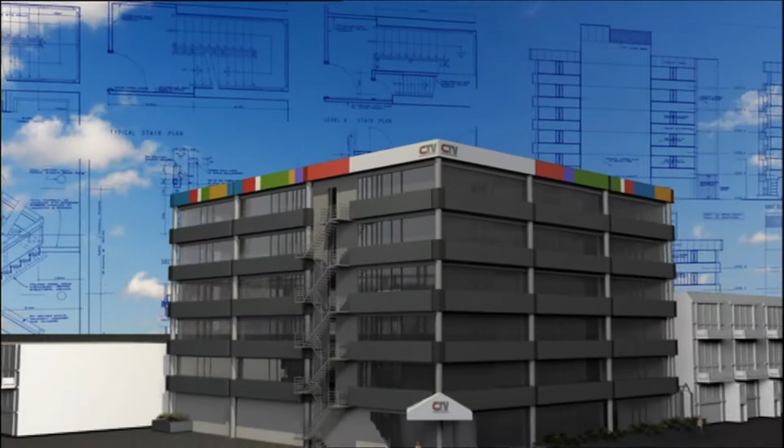When you look at the vacant space where the CTV building once stood, you can't help but wonder why it collapsed when the IRD building across the road seemingly escaped without a scratch. So Sunday went back to the drawing board, to the 1986 plans for the CTV building, and we discovered, even back then, a council engineer questioned aspects of the design. Then we took the drawings to America to get an independent analysis.

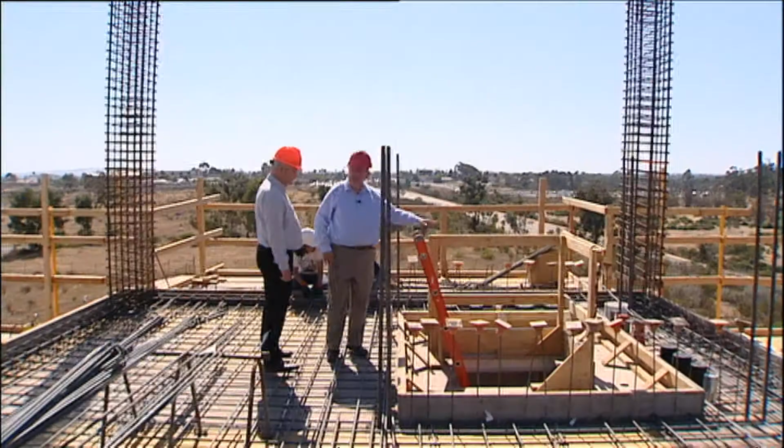San Diego, California. It seems like an unusual place to be trying to figure out why the CTV building collapsed in the Christchurch earthquake. But we've met a man here, a professor of engineering, who figures that he's got the answers. My journey has brought me to the Charles Lee Powell Structural Laboratories, to Professor Jose Restrepo. He spent his life making buildings safer in earthquakes, including 15 years studying and teaching at the University of Canterbury.

Appears to be a column here. Professor Restrepo inspected buildings after the Christchurch earthquake. The central city, he says, was hit by a massive vertical force that no one ever dreamed of. The intensity of the movement felt in downtown Christchurch was way more than what we had designed buildings for. But from the air, it's clear that while the CTV building was flattened, other buildings around it are undamaged. Could the design of this building have been a factor in the collapse?

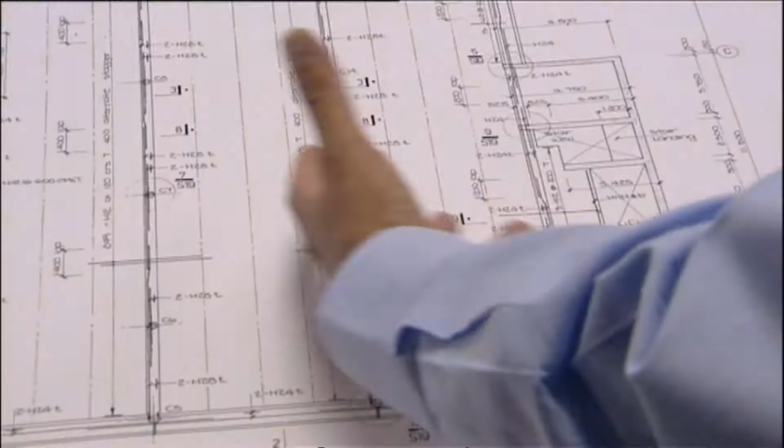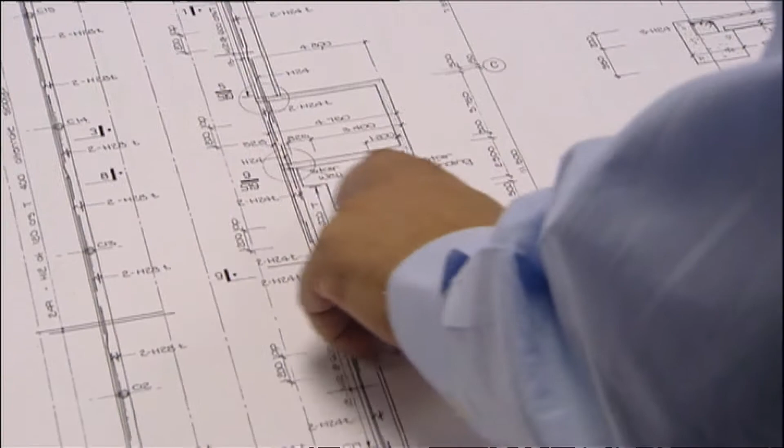There is no reinforcing bar coming out from the wall into the slab, okay? Professor Restrepo studied the CTV drawings. They confirmed his suspicions. You have the lift shaft here that stood up, and you have the floors of the building, okay? These floors and the lift shaft need to be connected, okay? Because in the case of an earthquake, these slabs have accelerations, and those accelerations with the mass produce forces. Those forces need to be taken back to the wall, to the lift shaft. In the CTV building, when we look at the drawings and the spot checks, we do find some critical areas.

The first critical area, he says, is the way the floors are tied to the lift shaft, using in places welded steel mesh. And those connections are rather precarious. They are precarious. And in a way, there were many buildings in that era that had these kind of connections as well. Why is the steel welded mesh precarious? Because it just fractures. It has no ductility.

This is welded steel mesh, similar to that used in the CTV and other buildings of the time. So this wire mesh, what you see here, is very brittle. Very brittle. It just takes a little pull and it snaps. And this is how it ended up. Mesh was often used inside the concrete floors, and in the CTV building used in places to tie the floor to the lift shaft. The lift shaft provides a lot of the stability, or the lateral stability, the lateral strength of the earthquake resistance to the building.

And it was later discovered the mesh can be brittle. So it actually bonds very well to concrete. So when the concrete has to move, the mesh has to follow. It doesn't have the deformation capability and it breaks. It snaps? Yeah, it snaps. And that, Jose believes, is what happened. The mesh snapped. It ripped off of the lift shaft and the building then went down.

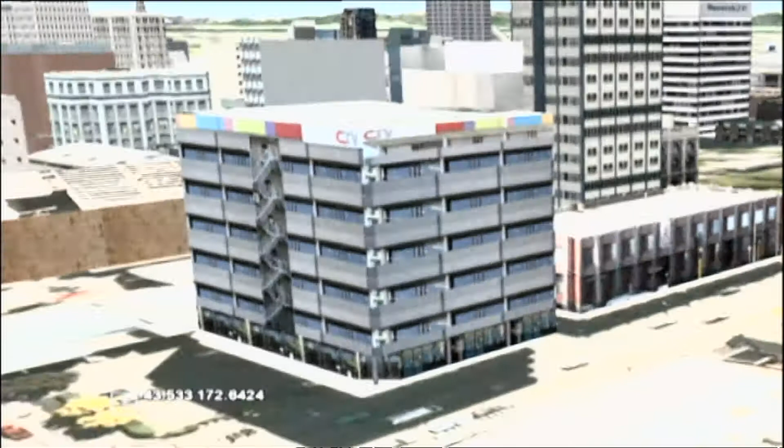However, even before construction on the CTV building began, the City Council had written to the design engineer asking for more information about how the floors would be tied to the lift shaft. Because the stability of the building depends to some extent on those connections. So they requested the design engineer for further information about that type of connection.

Do the council records show they got that information? Not in writing that we know of. Yeah, the only way I can think is that perhaps on a phone conversation they explained that, but there is nothing in writing. After the break, what happened to the columns? The columns could have exploded in compression, rendering the building useless, pancaking the building.

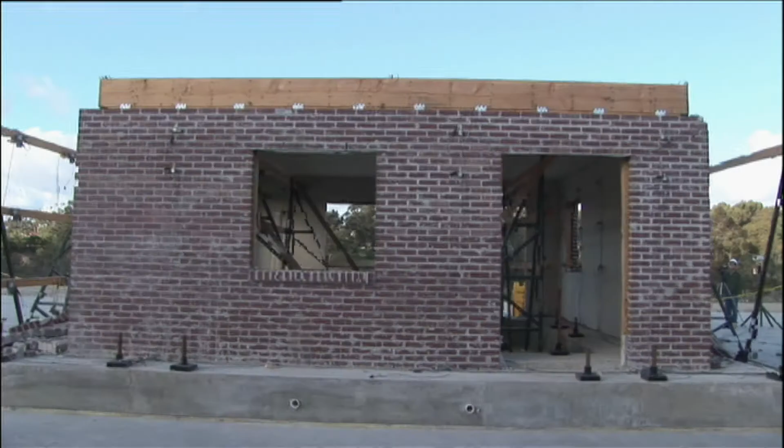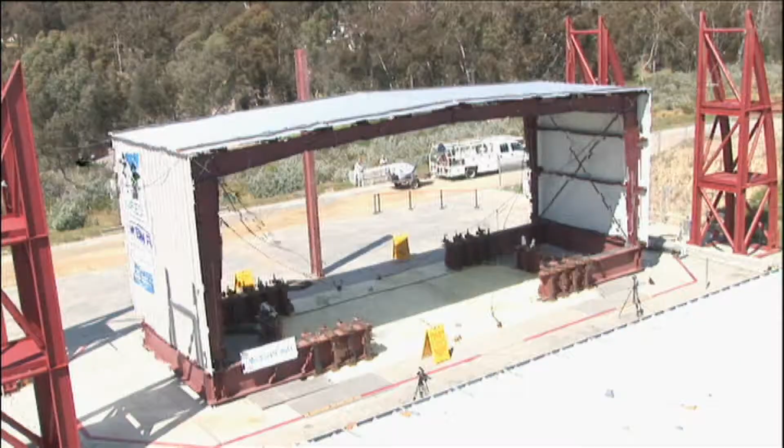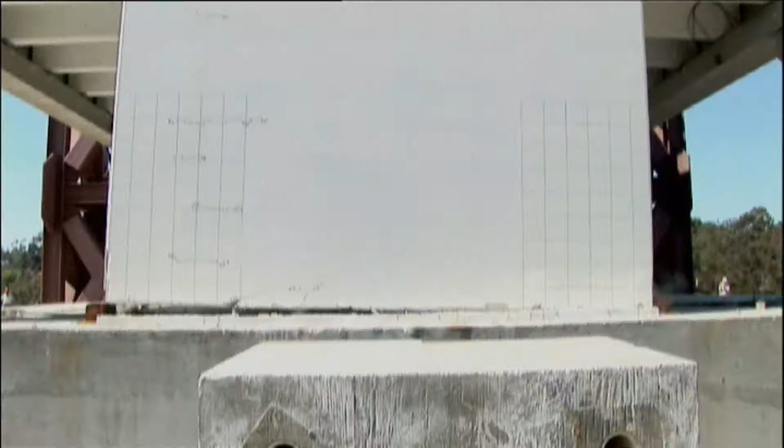It's Professor Restrepo's job to discover what happens to buildings in earthquakes. So this is the actuator, the ram that moves the shake table. So it reproduces the movement of the ground. He does this by shaking the living daylights out of full-sized buildings with these massive hydraulic rams. Right now they're constructing a 5-story building just so they can shake it to pieces and then set it on fire. This is how he and colleagues discovered in the early 1990s that welded steel mesh can be brittle and snap.

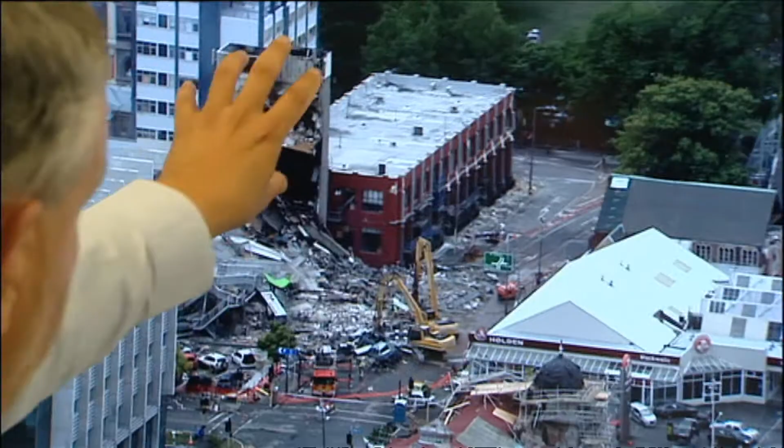And you can see, for example, there is not a single connection here, not a single connection in this. Using aerial video of the remains of the CTV building, Professor Restrepo showed me where he believes the welded steel mesh simply snapped off the lift shaft. So totally disconnected from the backbone, if you like. And Professor Restrepo believes there was also a problem with the columns. The columns could have exploded in compression, rendering the building useless, pancaking the building. What I can see from the photos, the building has not spilled to the parking lot or to the street,

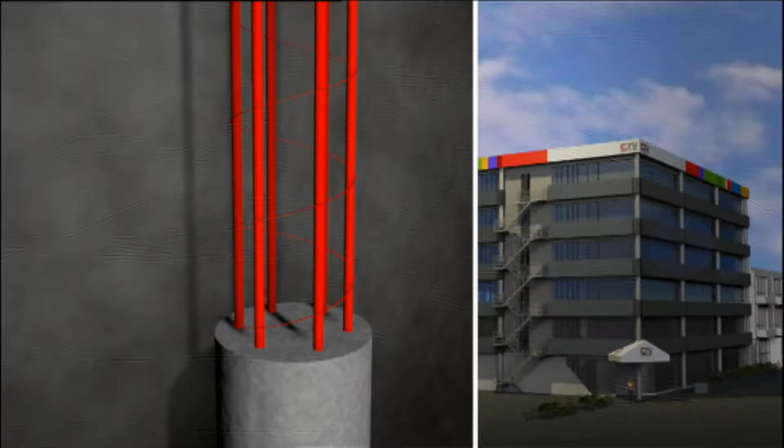has basically imploded. In Professor Restrepo's opinion, there simply wasn't enough steel to hold the columns together. The columns in the CTV building were confined by a coil of just 6mm steel rod spread at a pitch of 250mm. What is surprising here is that the columns have just very little confinement. So it's like the weightlifter that doesn't have a belt here and is about to take that load and it bursts. Professor Restrepo believes the vertical force from the earthquake first lifted the building, and when it fell again, the lower columns exploded. It's a terrifying story for that building. How does he know this?

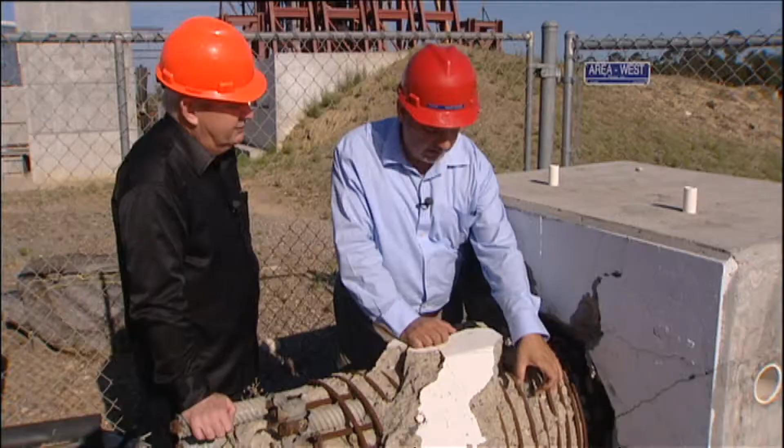Well, the lab in San Diego is continually testing column designs like this one. We have coil, and this is a 12mm coil, more or less at 45mm pitch. So is this how the columns should have been built in the CTV building? Yeah, in a very similar manner, not identical, every column may be different, but in a similar manner.

In a simulated earthquake, the steel prevents the column collapsing. So the steel is thicker and it's banded closer together, is that right? It is indeed. Yeah. In the CTV building, we'll see a little bar here, and then again, we'll see another one here. Right. Yeah? So the pitch was extremely wide.

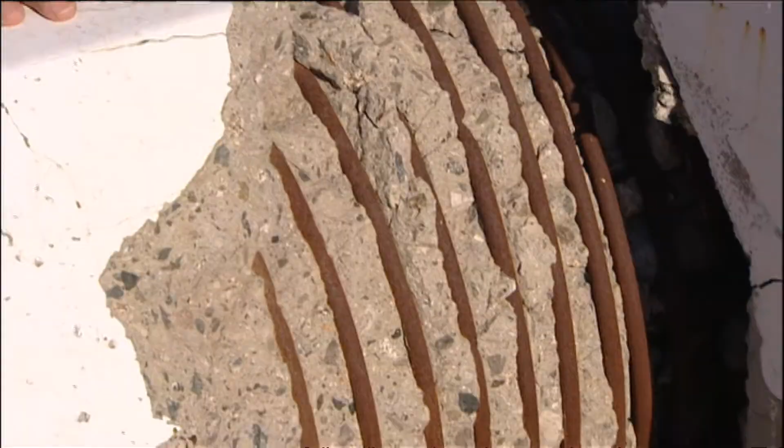Amongst the rubble of the CTV building, beams, mesh, but we could find only one round column. The thin coil mangled, the concrete gone. The floors imploded, the columns exploded. That's the hypothesis. And everything fell over like a stack of pancakes. Oh my God, that's the CTV building.

Oh my God. We wanted to know if the structural engineers who designed the CTV building agree with Professor Restrepo's hypothesis. Alan Reay Consultants were the structural engineers for the CTV building built back in the mid-80s. The principal of that company, Dr. Alan Reay, told me he's not prepared to talk on camera at this stage about the design. However, Professor Restrepo told me that he believes the CTV building did meet the building code of its day, although it would not meet today's codes.

For engineering assistance, where extensive building damage is observed and a rapid assessment, level 2 is to be undertaken. The process of inspecting buildings after the September and Boxing Day earthquakes has also been criticised. Was the CTV building safe enough to be reoccupied? Well, relatives of those who died believe that long before it collapsed, the building shook oddly every time a truck went past. It could also mean that during the first shock, the building slightly detached from the lift because the welded mesh may have fractured. And that might explain what Viv Bishop saw.

On both sides of the elevators there was cracks up the wall, and on the right there's a little window, and when you looked out there you could actually see a crack down the building. Her daughter Nina had been worried. After the Boxing Day one, she didn't feel that safe in there really. She'd talk about the shaking and the shuddering of the building. Did anyone say, look, we think this is an unsafe place to be? It was mentioned to the owner of the clinic, but he assured everyone that it was quite safe, and I think CTV staff will say the same thing.

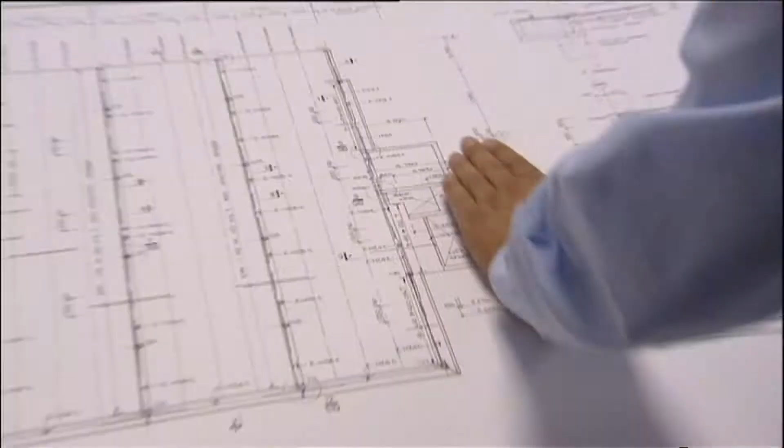Professor Restrepo believes it would have taken an experienced engineer with access to the building drawings to spot danger caused by broken steel mesh. And even then, the task wouldn't have been easy. You may have spotted something that you want to recheck, but I think it's pushing for what we normally do. Now that we know what can happen, do you think that the stickering process, the way that buildings are inspected in future, should change? Yes.

The CTV building collapse may act as a wake-up call for building owners, not just here in Christchurch, but throughout the country. The things we learn here need to be applied very widely, and they will change the building codes in New Zealand. They will change the building codes in many places in the world. Let's not get complacent. It could happen to you.

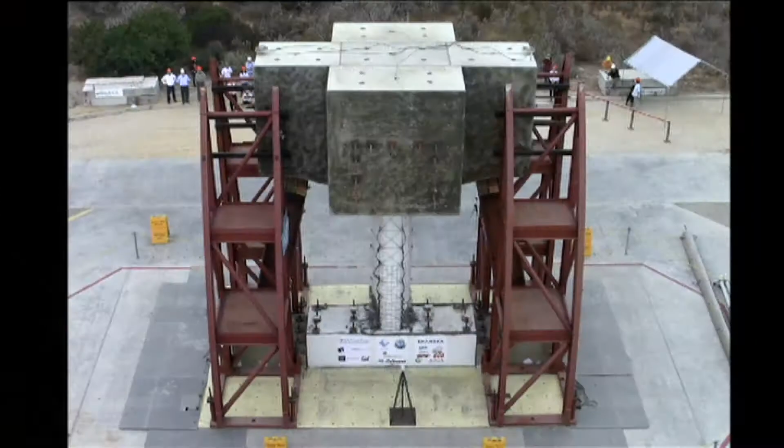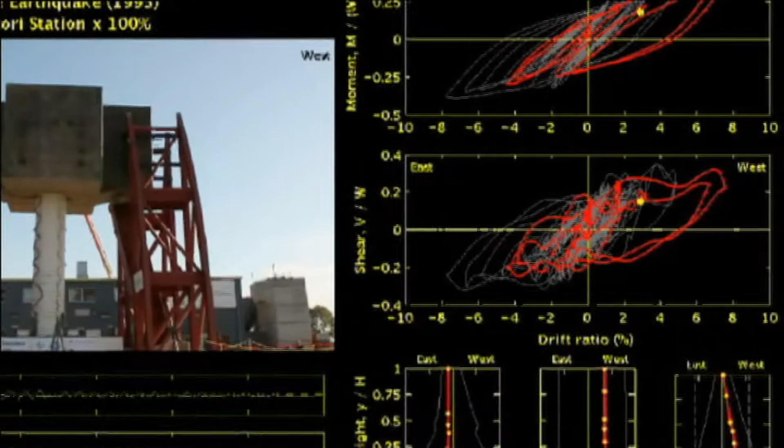Ideally, says Professor Restrepo, buildings should be monitored electronically, in the way that modern cars and aircraft are monitored. We should be able to deploy sensors to look at what the building did during the earthquake and after the earthquake, and see if we capture signals of distress that warrant a more refined inspection. And building drawings should be stored electronically, so they're easily accessed in an emergency.

But perhaps the biggest lesson to be learned from the February quake is also staring us in the face. That even though this was one of the most powerful forces ever to hit a city, most modern buildings, those designed to withstand powerful earthquakes, are still standing, thanks largely to the work of people like Jose Restrepo. Modern buildings are standing except for a few. Some may have to be demolished, but people are alive. You can rebuild with new techniques that allow you to survive the next earthquake.

CTV design engineers Alan Reay Consultants say they too were horrified by the tragedy and are working with the Royal Commission to establish the cause.